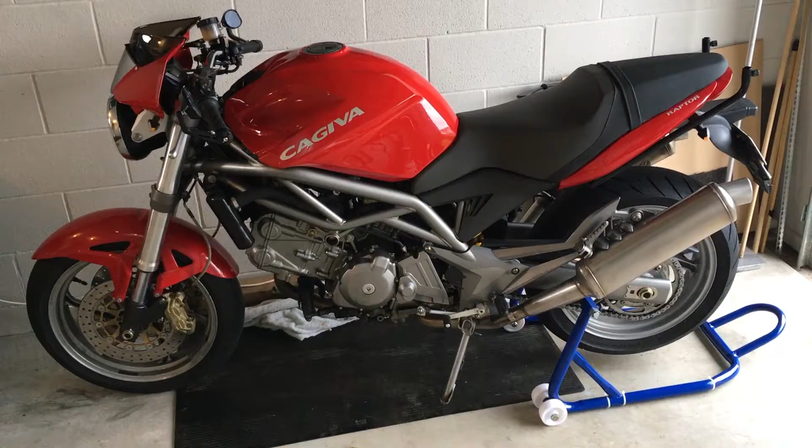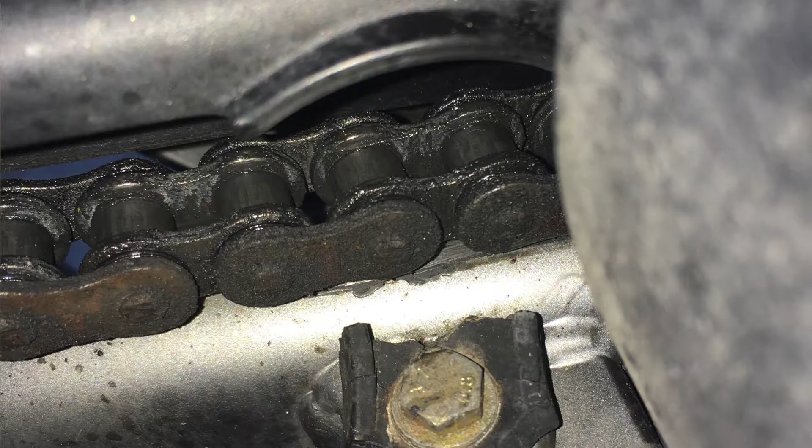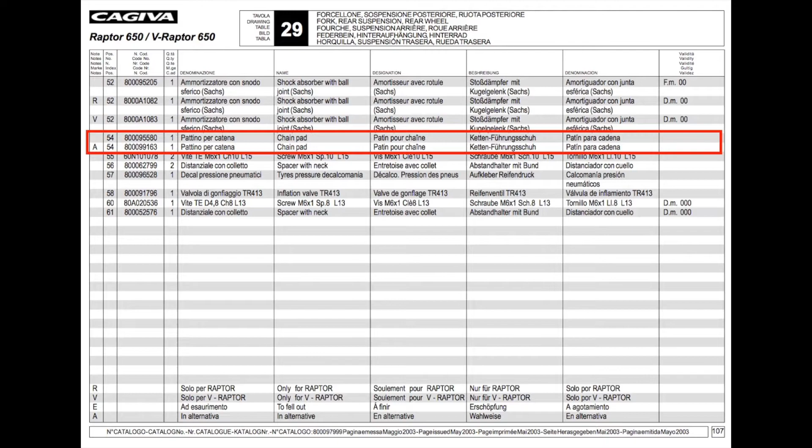This is my new bike, and as I mentioned in my last video introducing it, I had an issue with the chain slider. I noticed when I brought it back home after riding it the length of New Zealand that the chain slider had actually disintegrated. After some homework, I found out that this is a part that's virtually impossible to find anymore, as Cagiva is no longer made. Cagiva bought MV Agusta, and then the brand decided to focus on MV Agusta only.

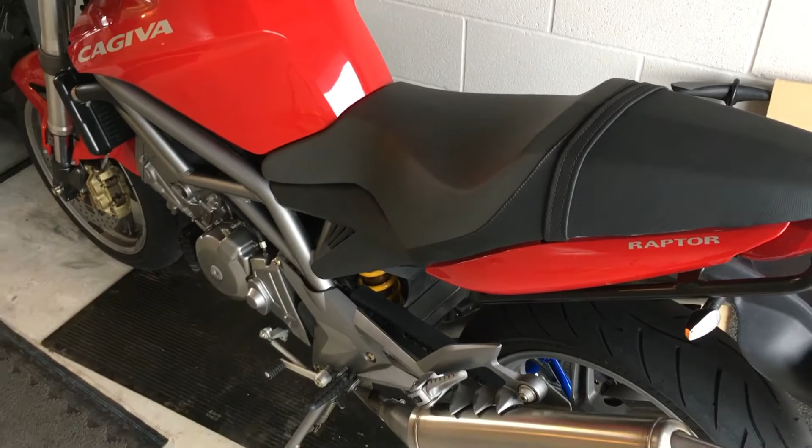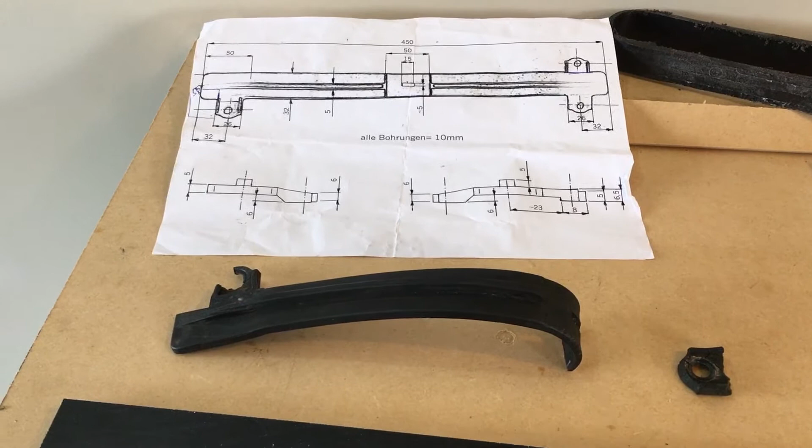So parts are very scarce or impossible to find, as I found out. I did some searching on the internet and found in forums that a lot of people have had the same problem. Someone had actually created a 3D printer file of the part, and I looked into this, but it seemed to be quite expensive to do. I don't have a 3D printer, and it also had to be printed in nylon, which makes it more difficult because that material isn't the easiest to print in.

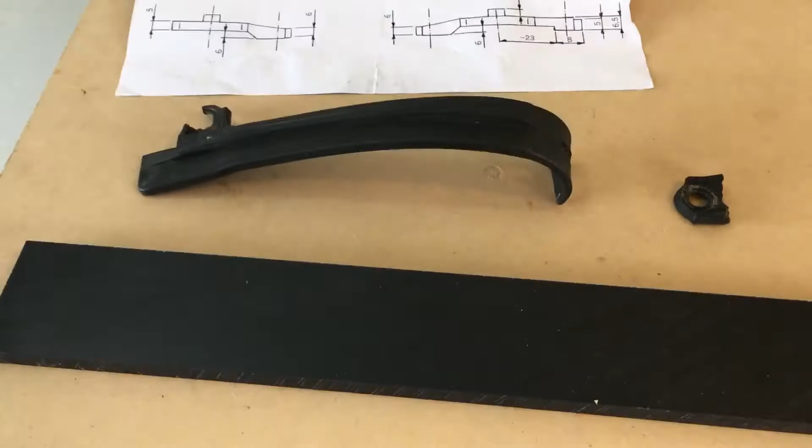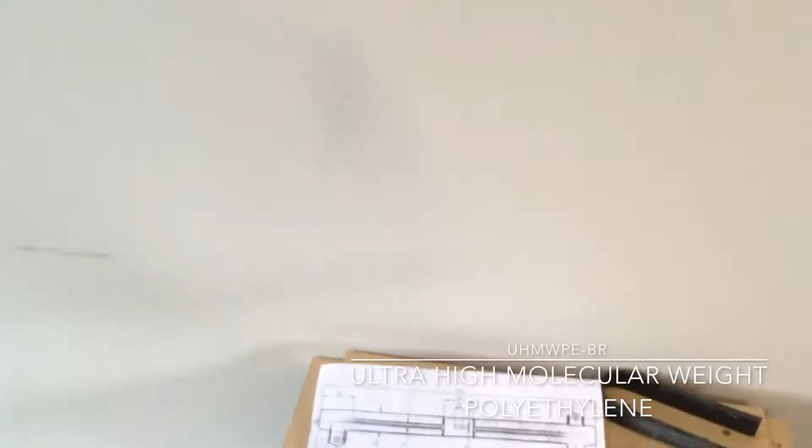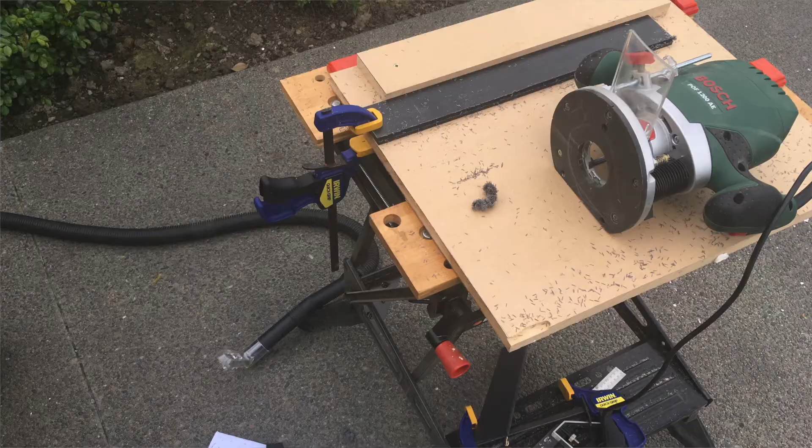I also found this drawing online, which I don't think is the actual Cagiva chain slider part, as this bit here isn't needed, and there's also a little cut here that you need to do to fit into the bottom of the swing arm. I basically used this jig with everything set up, and used a router, planing it several times up and down the piece to form the shape, and also to bring out this ridge where the chain slides over.

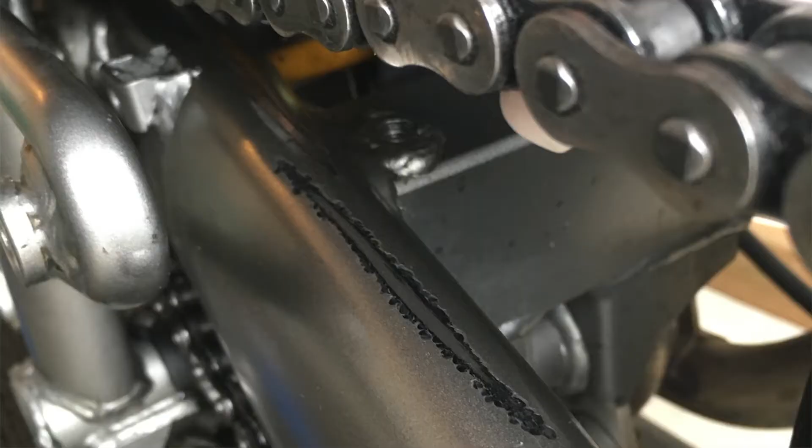What is the purpose of a chain slider? Well, it's basically to protect your swing arm from the chain scraping along the metal. And this is the original one - as you can see, it's all perished.

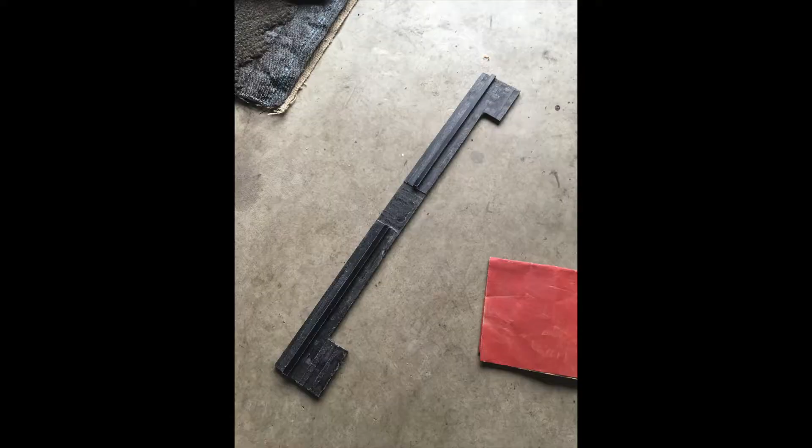So I used this as a template along with the drawing. As you can see, this is the finished product. The one issue was that it was really hard to get onto the swing arm because the plastic was quite hard, whereas the original part was quite rubbery and flexible.

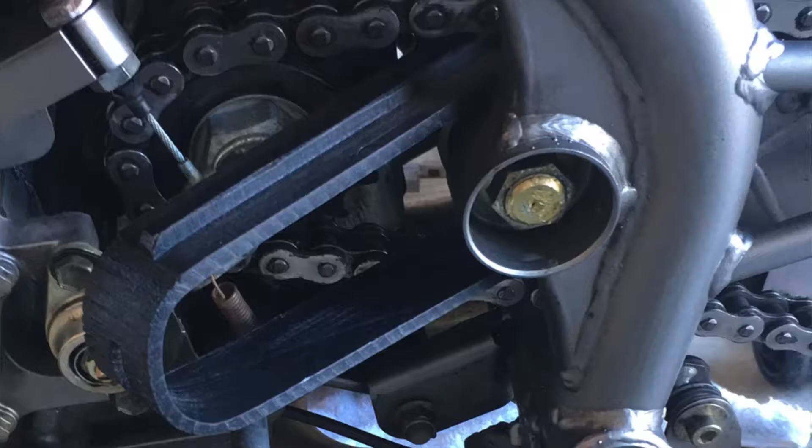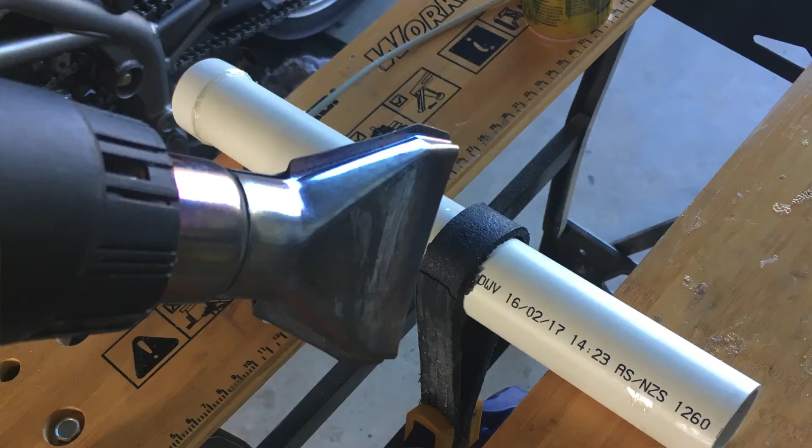So Matt and I struggled for about an hour and a half or so. In the end, we formed the slider to have the bend using a heat gun, the sort you use to get rid of paint on walls. This softened the plastic to give it that bend, and we had to reheat it again to make it more malleable, so the chain slider matched the pin at the front, but also stretch it a little to get it precisely where the bolts fit in for the slider.

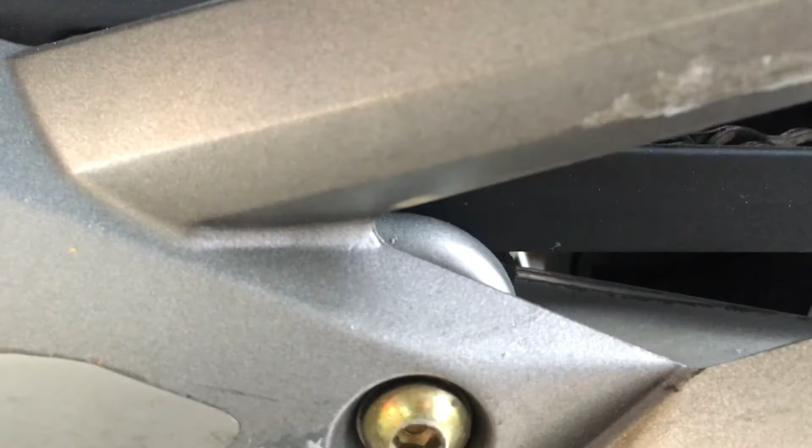I've ridden the bike for about 2 or 3 hours now since fitting the slider. There's no obvious noise - in fact, I think it was making more and more noise before from scraping on the swing arm. I don't think there was too much damage. Another thing I should probably do soon is give it a lick of paint, because I'm pretty sure if it's steel, it will rust quite soon.

So that's going to be my next job. Anyway, I hope this helps. I guess if you're watching this video, you've got the same problem. There seem to be quite a lot of people asking in forums about the slider, with many going without one, but I personally wanted to refit it and do the best job that I could.

So the tools you need would be a router, the plastic mentioned before - I'll put details here - and also a Dremel drill is useful, along with an oscillating saw for cutting fine parts. It was relatively easy to route; I wasn't too sure what it would be like with the cutting blades, but it cut like butter. Hopefully it doesn't mince up like butter with the chain, but we'll see. So far it doesn't seem to have much damage, and I think this is going to probably last a lot longer than the stock version.